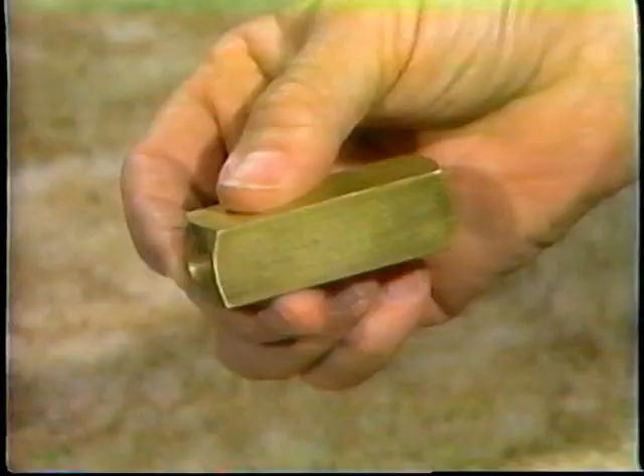Here is an important pneumatic system component. It's called a check valve because it allows air to flow in only one direction. You can see that there are only two openings in the valve body, the inlet and the outlet.

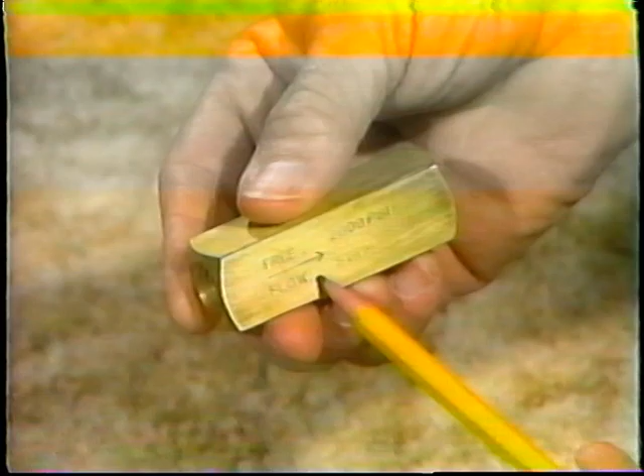This arrow indicates in which direction the valve will allow air to flow. Here we can see all of the main parts: this is the valve body, and these are the inlet and outlet ports.

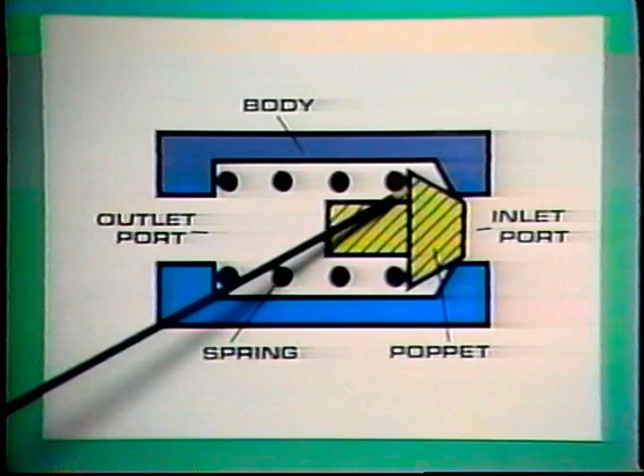The movable part is called a poppet, and it's held in place against this valve seat by this spring. The poppet in many check valves uses a seal made of a resilient material. It assures that the flow is fully stopped or checked when the poppet rests against the valve seat.

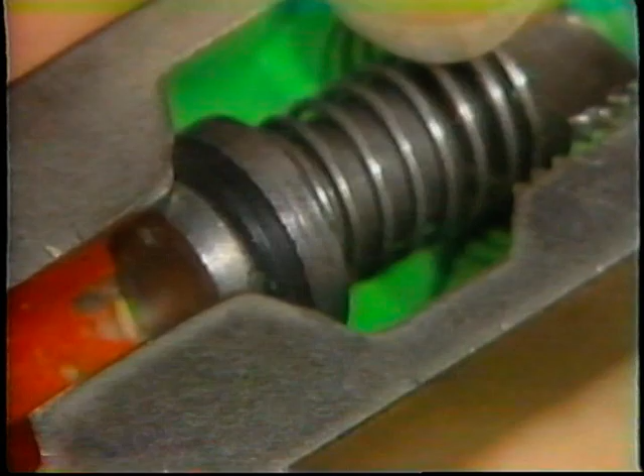Right here we should explain a new term. The term is biasing. It means that a force is applied to a moving part to hold it in a certain position. In the case of the check valve, the poppet is biased against the valve seat by the force of the spring. Here's how the check valve works.

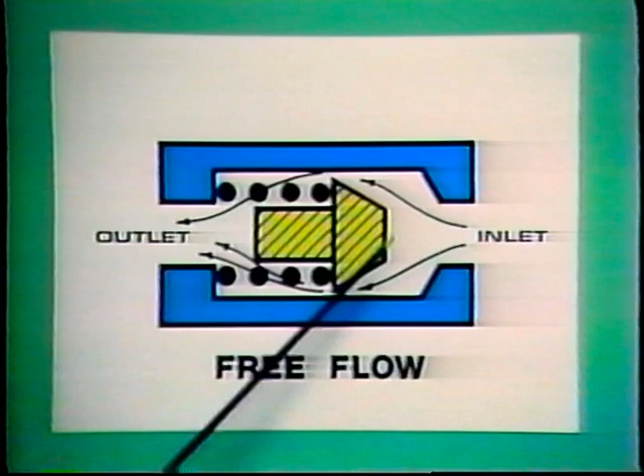When the system pressure at the inlet becomes high enough, the force of the air overcomes the force of the spring and any back pressure, and the poppet moves away from the seat. There is now a path for air to flow from the inlet through the valve to the outlet.

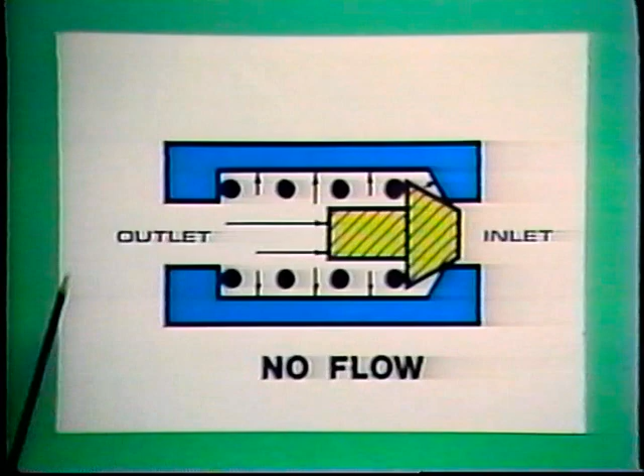This is defined as the check valve's free flow direction, and when the pressure at the inlet drops, the poppet is again biased closed against the valve seat. If air attempts to enter through the outlet, the poppet is pressed firmly against the valve seat, blocking airflow through the valve.

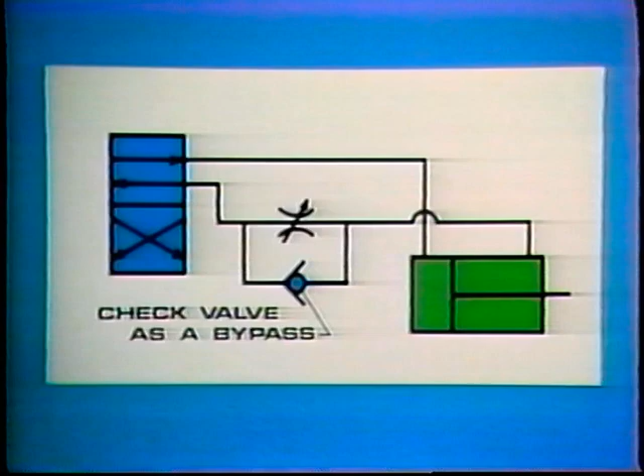The application allows free flow around a flow control valve, which otherwise would restrict flow in both directions. In this case, it allows air to enter more quickly into the cylinder, so the cylinder will retract more rapidly.

You'll remember back in Lesson 2, we described how a simple pneumatic cylinder works. Well, the cylinder is the most common type of pneumatic actuator you'll find in use. The primary purpose of a cylinder is to convert pneumatic energy into straight-line mechanical energy.

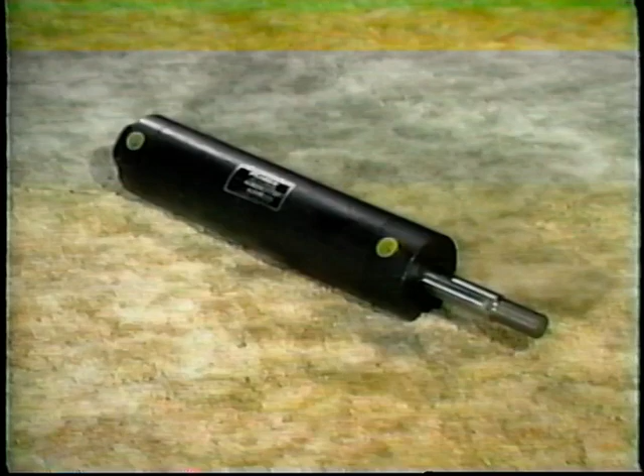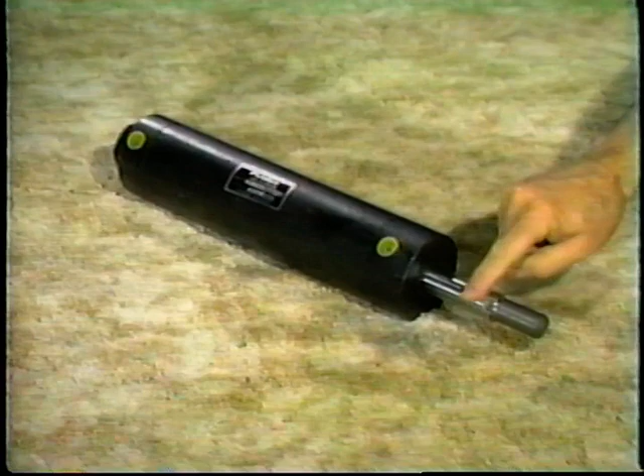Here is a typical pneumatic cylinder. There are two cylinder ports here and here, and this rod is attached to the piston inside the cylinder. This end of the cylinder, where the rod comes out, is called the rod end. The other end is called the cap end.

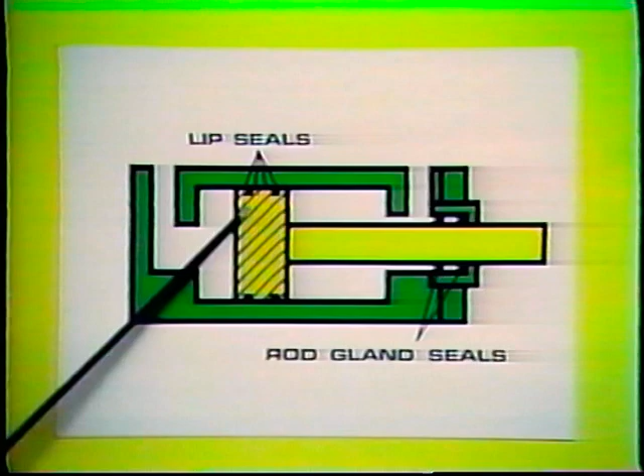This drawing shows two important areas of the cylinder. They are the lip seals on the piston and the rod gland seals here around the rod. For proper operation of a pneumatic cylinder, a positive seal must exist at both of these points.

Their purpose is to prevent air from leaking. If leakage occurs, the cylinder won't develop its full rated output, and system efficiency will be reduced.

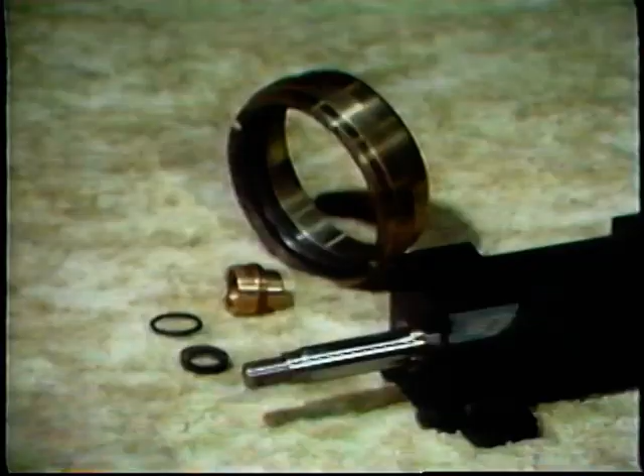Rod gland seals are used to provide an airtight fit where the rod comes out of the cylinder. They come in many sizes and are generally made from a resilient material. Here are some examples of rod gland seals.

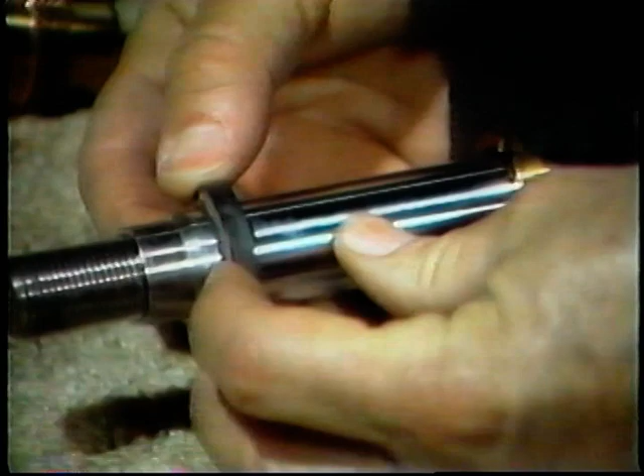This one is a popular type. It is a lip type. The edge of the lip contacts the cylinder rod continuously and provides a good tight seal at low static and dynamic forces.

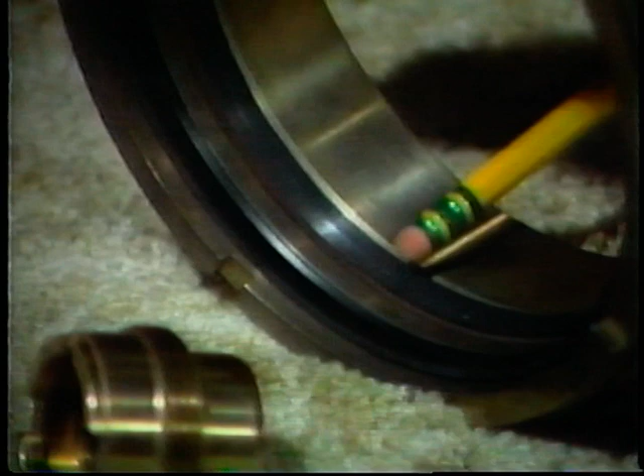Rod gland seals consist of a primary seal and a wiper seal. The primary seal keeps air and oil inside the cylinder. The wiper seal cleans the rod as it retracts.

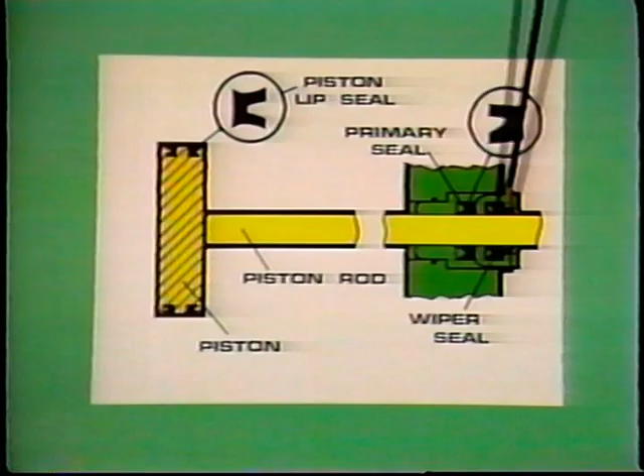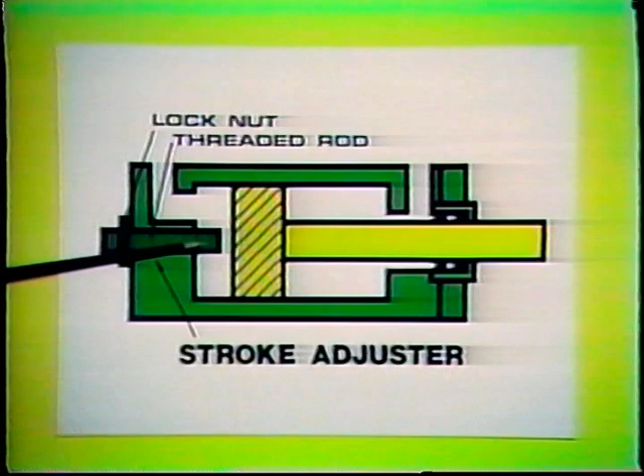Since cylinders can develop large forces and must be able to be mounted in a variety of industrial applications, you should be familiar with different mounting methods. Let's take a look at some of the more common types of mountings.

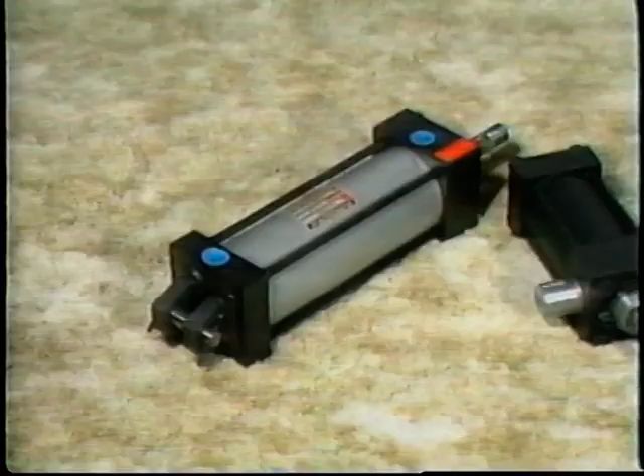This one has a fixed clevis on the cap end. It is a flexible mounting and allows the cylinder to pivot. This one uses a head trunnion on the rod end, which is another type of movable mount.

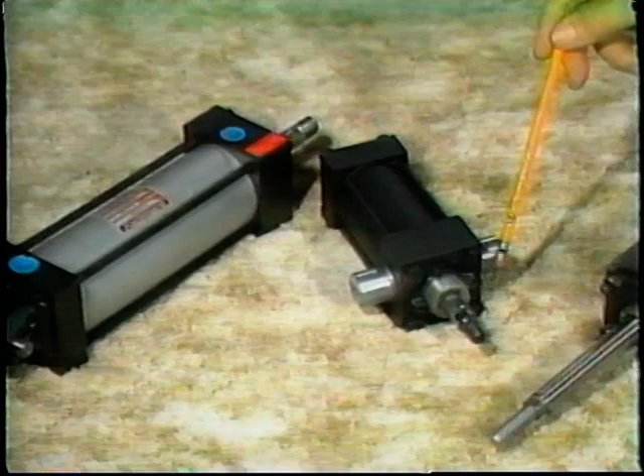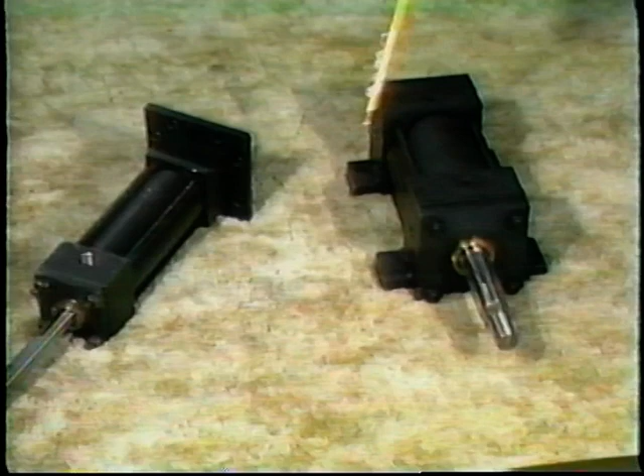This one has a mounting flange, so it can be bolted into place. And this one has side lugs attached to the end caps. Both of these last styles would be okay where rigid or fixed cylinder mounting is required.

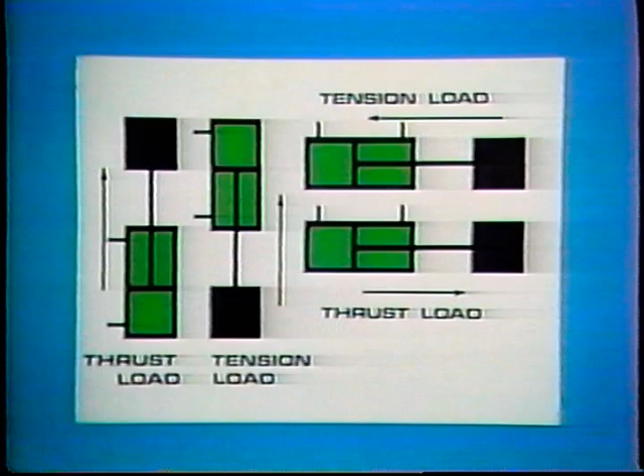No matter what type of system is used, you're going to hear two terms used quite frequently: thrust load and tension load, and you should be familiar with what they mean. When a cylinder is connected to a load, and work is done when the cylinder rod is extending or pushing on the load, as you see in this illustration, it's called a thrust or compressive load. If work is being done while the cylinder rod is pulling on the load, it's called a tension load.

It really doesn't matter how the cylinder is positioned, whether mounted vertically or horizontally. The meaning of the terms remains the same.

Because industrial applications cover such a wide range, a number of different types of cylinders are used in system design. Let's look at some of the more common ones.

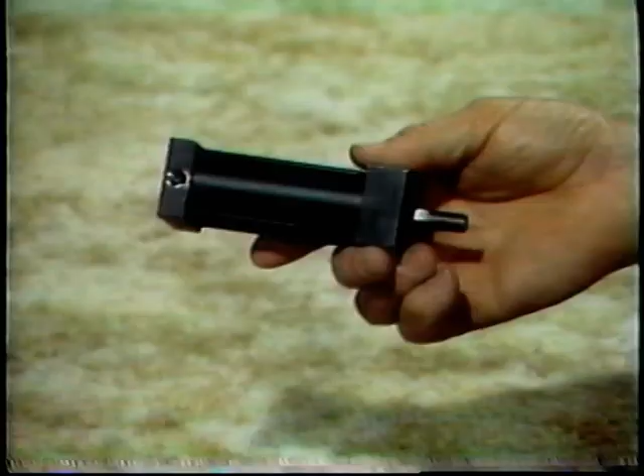This is a single-acting cylinder. It's called a single-acting cylinder because air pressure is applied to the movable element in only one direction, through this inlet port here, and this causes the piston rod to extend. A spring is used to return the piston assembly.

This is called a single-acting spring return cylinder because air pressure is applied in only one direction, here, and the force developed by this spring makes the rod retract. This vent hole is to allow air that's trapped behind the piston to escape as the piston moves.

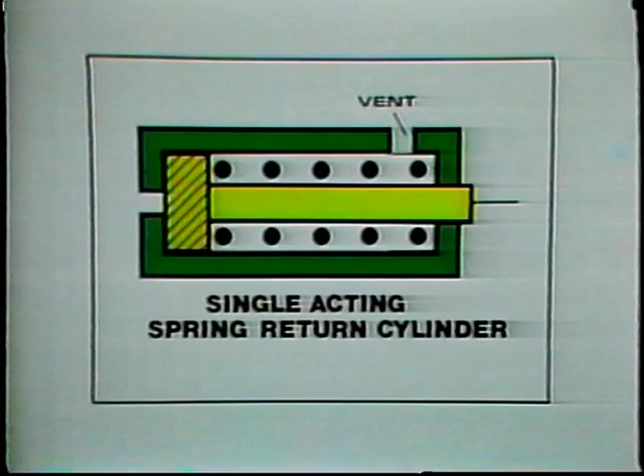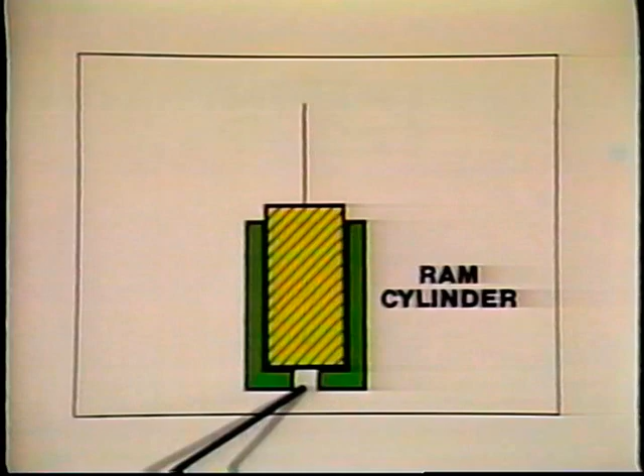Here's what's called a ram cylinder. It's basically a single-acting cylinder because there is only an inlet port here, but you can see that in this case the movable element is the piston rod itself. Gravity, or some other external force, returns the piston.

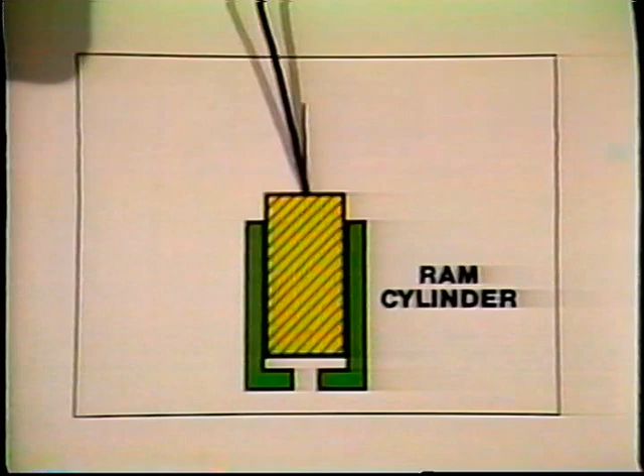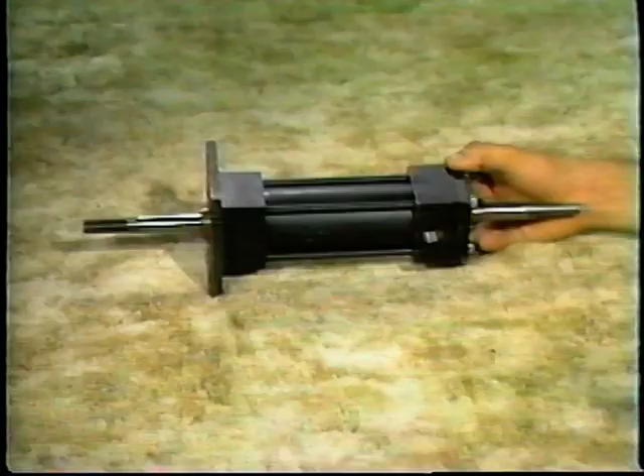If we make a cylinder with two rods connected to the piston, we have this type of actuator. It's called a double rod cylinder. With this type of unit, we can design systems with mechanical linkages connected to both ends. Depending upon our circuit requirements, the rods can be of different diameters to handle different sized loads.

You can see there are many types and styles of cylinders, and they can be used to cover a wide range of system applications. Not only is it necessary to select the right type of cylinder to do the job, but it must also be of the proper size. So let's examine what's involved in sizing a cylinder.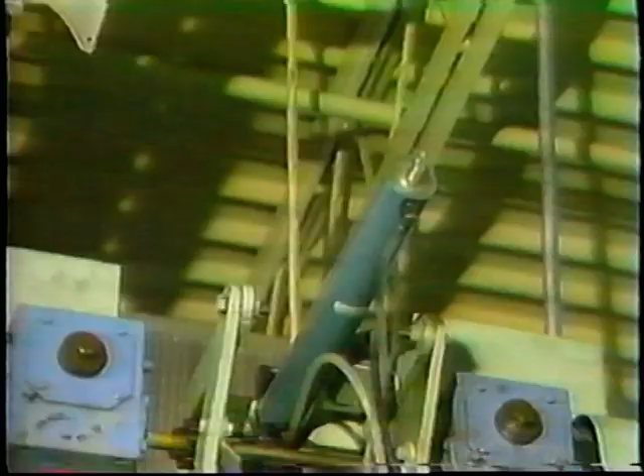First, we have to know certain things about the load. Not only the size of the basic load to be moved, but also what kinds of forces are needed to accelerate the load and to overcome any system friction.

When the total load has been determined, including the weight of the piston rod, we can calculate the cylinder size using Pascal's law. We covered it in Lesson 2. Do you remember what it was?

Here is the relationship. It tells us that the force developed by a cylinder is equal to the system air pressure times the cross-sectional area of the piston. Remember, the units have to be right. So if you want to get force in pounds, pressure must be expressed in pounds per square inch, and the area must be in square inches.

Now let's see what this means when we look at an actual pneumatic cylinder. The first thing we have to do is to define a few terms.

We're going to have to use two pressures. The one at the cap end of the cylinder we'll call P sub C, and the one at the rod end we'll call P sub R.

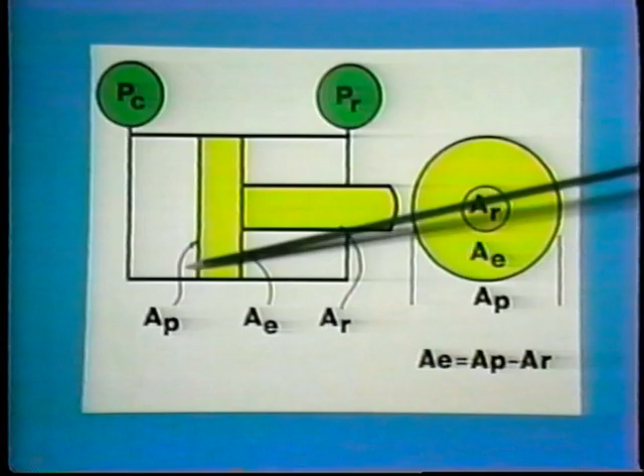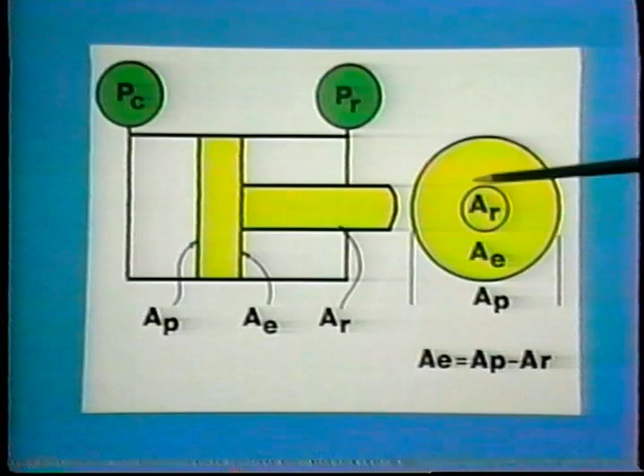Here are some important areas. This one here on the cap end is really the total area of the piston and the seal, so we'll call it A sub P. This small area is the area of the rod, and we'll label it A sub R. If we subtract the rod area from the area of the whole piston, we get the remainder, and it's called A sub E. The E stands for effective area, and it's here on the rod side of the piston.

Depending upon the application, a cylinder may be driving either a thrust load, that's one where the cylinder is doing work when the rod extends, or a tension load, where the cylinder does work when the rod retracts.

Here is the relationship to use for a thrust load. The compressive force that must be delivered by the cylinder we've labeled F sub C. The C stands for compression, because the rod is actually being compressed as the cylinder does work. The compressive force equals the pressure on the cap end times the total piston area.

In those cases where we have a back pressure, as will be the case when there is a flow control valve in the exhaust line, our formula now becomes F sub C equals P sub C times A sub P minus P sub R times A sub E. We subtract the pressure at the rod end times the effective area. However, under most conditions, the back pressure is assumed to be 0, and the formula once again becomes F sub C equals P sub C times A sub P.

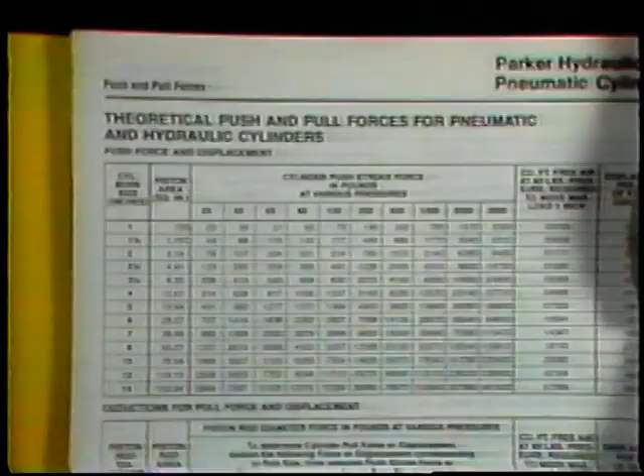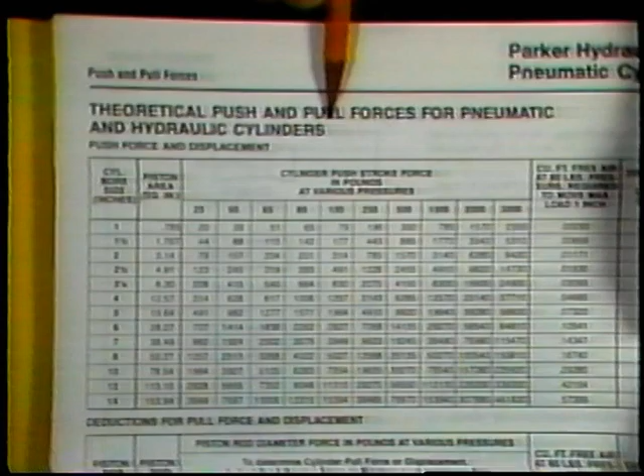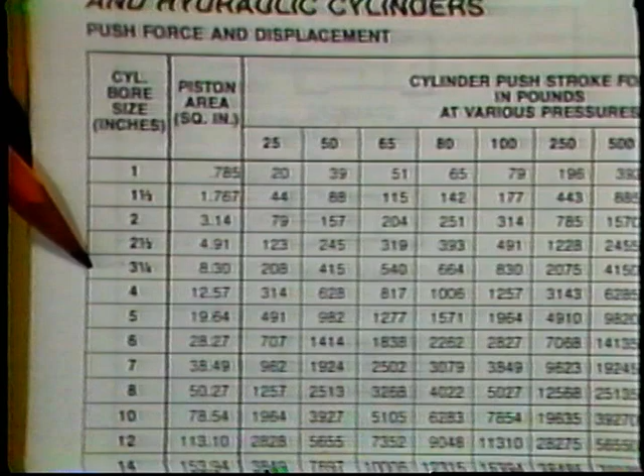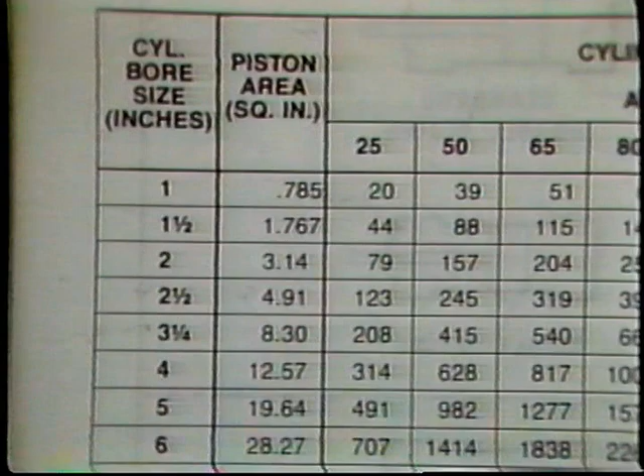Many manufacturers provide cylinder sizing charts in terms of cross-section area. This makes the selection job easier because it isn't necessary to calculate the diameter as we've just done. Just remember to select the smallest standard size piston to do the job. In our example, with a required diameter of at least 2.52 inches, a standard cylinder size of 3.25 inches is called for. But look at the area of the 2.5-inch cylinder. It is very nearly the 5 square inches that we need. In fact, we are so close to being able to use a 2.5-inch cylinder that it is the one we'd probably choose. It will move our load at a pressure of 51 psi.

The example we've just shown was for determining the size of a cylinder when there is a thrust load. How about a situation where we have a tension load? Well, we can still use Pascal's law just as we did before. As you can see, we've rearranged a few terms, and this is the equation. F sub T is the force that the cylinder must supply during retraction to move the load, and it equals the pressure on the rod side, P sub R, times the effective area on the rod side, A sub E, minus any force on the piston side, P sub C, times the piston area, A sub P.

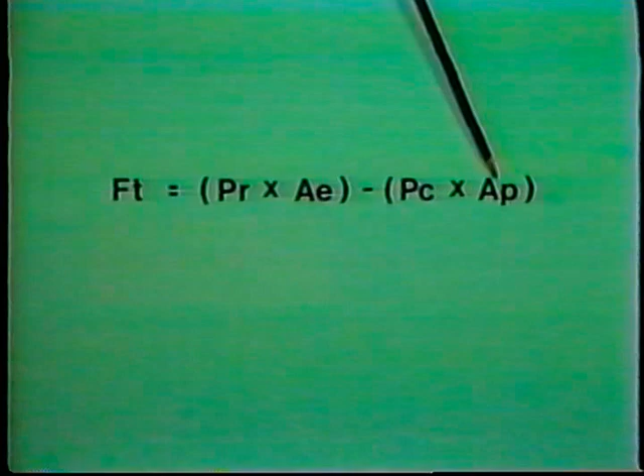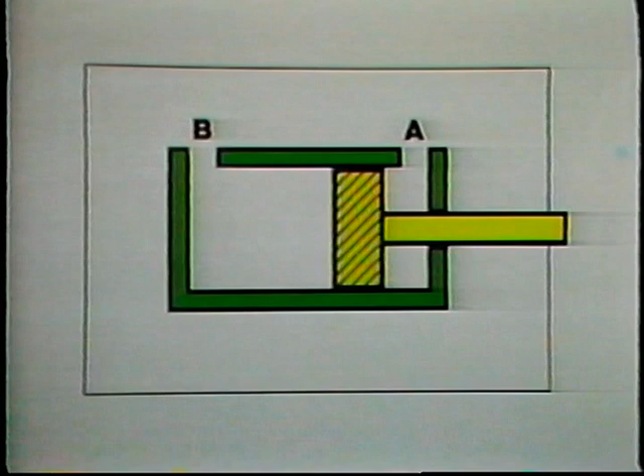And we can simplify this relationship. How? Well, since we are allowing air to exhaust freely from the cap end, the pressure at the cap end would be very, very small. We can, in fact, assume it is zero. So we can ignore that part of the equation. And here is our final equation, rearranged for effective area. It tells us that the effective area, A sub E, will be equal to the tension load, F sub T, divided by the pressure at the rod end, P sub R.

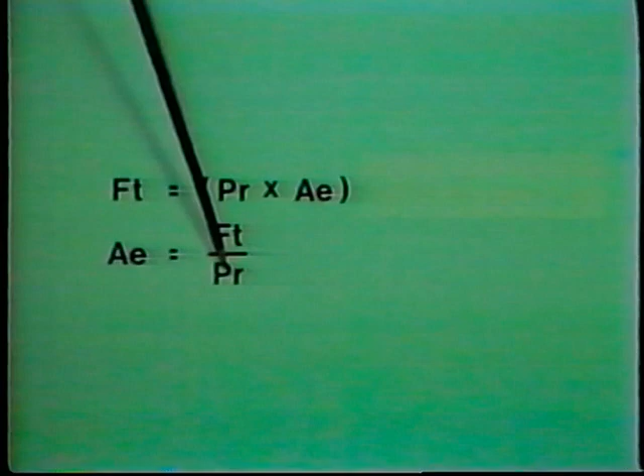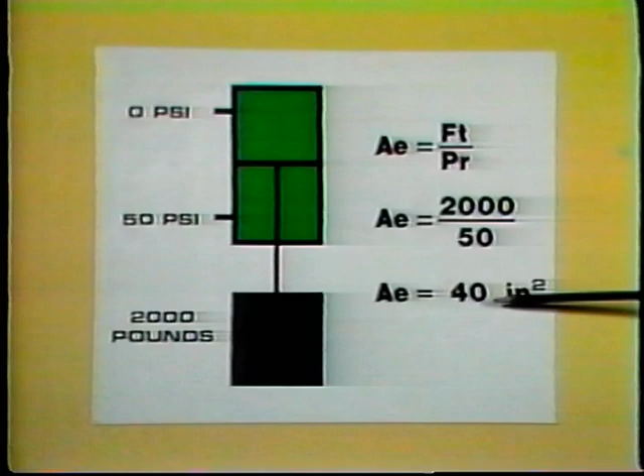Suppose we wanted to lift a 1-ton load and had a working pressure of 50 psi. The tension force would be 2,000 pounds, and the pressure here would be 50 psi. Using our simplified equation, we divide the force or load, 2,000 pounds, by the pressure, 50 psi, and see that we'd need a cylinder with an effective area of 40 square inches.

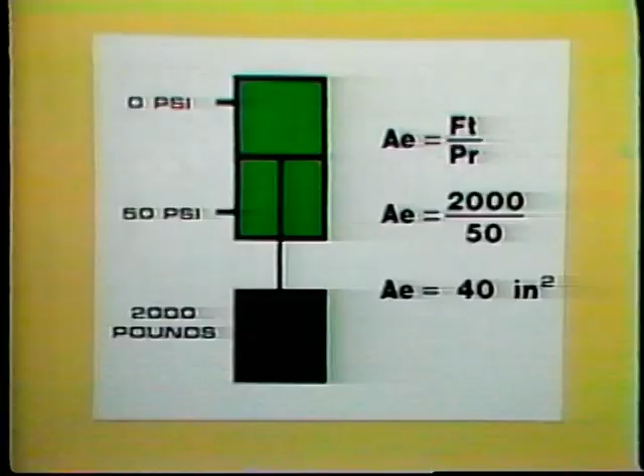Now, piston rods come in various diameters, and we'll go into how to size a rod in Part 2 of Lesson 7. But for now, let's assume that a 1 3/8-inch rod is required here. So how large a piston would we require to get an effective area of 40 square inches on the rod end? Well, first we determine that the area of the rod is approximately 1.5 square inches.

Then we take our formula for effective area and rearrange it like this. Our effective area must be 40 square inches, and the area of our rod is approximately 1.5 square inches. So the area of our piston will have to be at least 41.5 square inches. And as you'd find out from a manufacturer's chart, the smallest standard cylinder available to do the job will have an 8-inch bore.

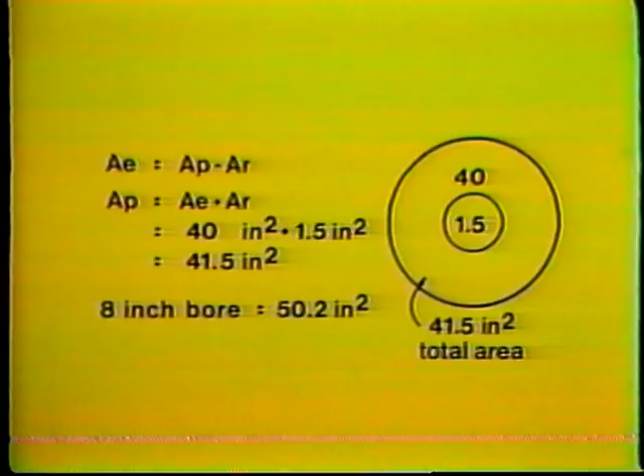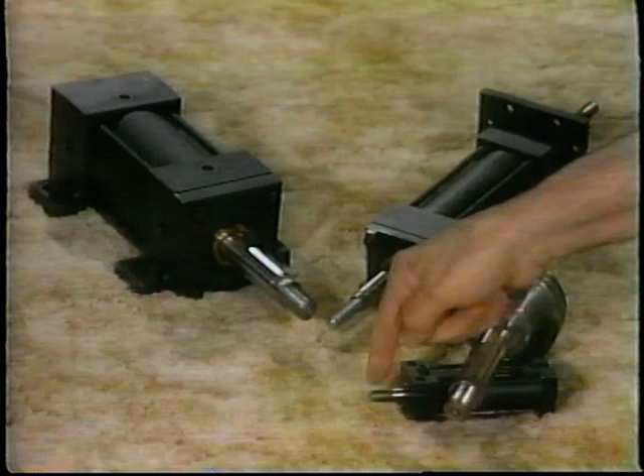Okay, there are 3 more important things you should know about a cylinder when you are repairing or replacing one. First, as I mentioned a minute ago, rods come in various diameters. The size used depends on the particular load situation. Sometimes rod diameter can be very critical, and if a rod is too small for the job, it can actually buckle. So when you are replacing a cylinder, it's important to be sure that the new one has a rod with the same diameter as the one you're replacing.

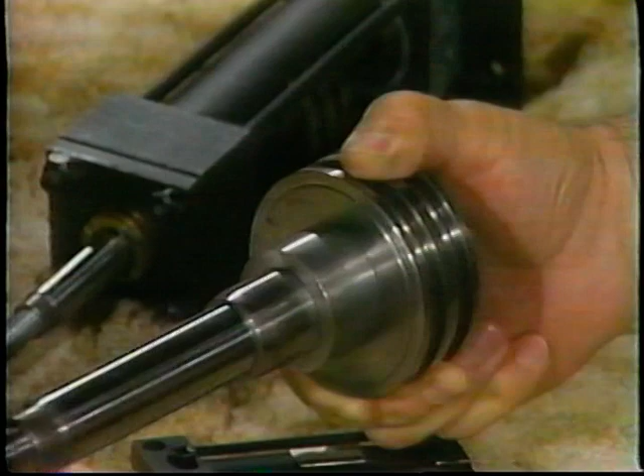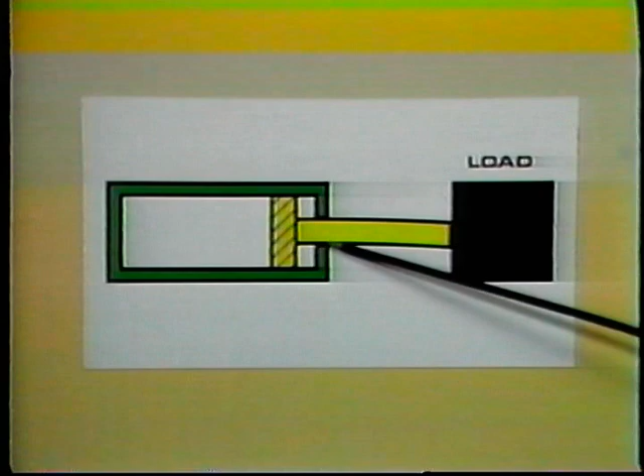Second, when you open up a cylinder, you'll sometimes find one of these. It's called a stop tube, and as you can see, it is a metal collar, and when it's in place, it fits right here over the piston rod. Let's see why it's sometimes needed. What happens when a cylinder is driving a load that is unsupported? Well, there are stresses placed on the piston and cylinder. The weight pushing down out here creates an upward stress in here, and the rod gland here can have so much side loading force placed on it that it can wear out very quickly.

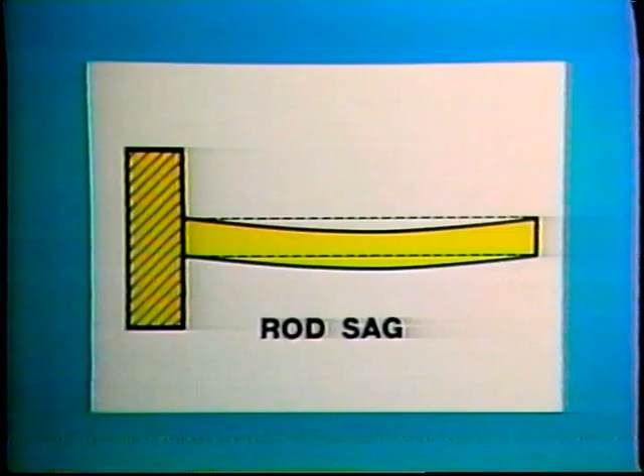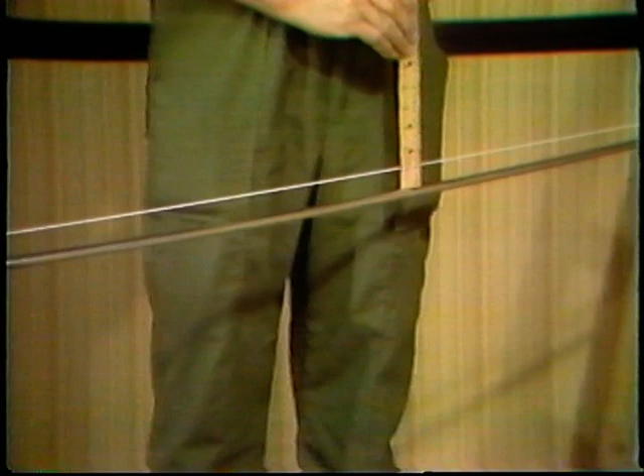Sometimes, even when the load itself is supported, the weight of just the rod can be enough to do damage to the cylinder or rod gland. Here is an exaggeration of what the piston rod looks like when a long-stroke cylinder is fully extended. You can see how the rod sags because of its own weight. In fact, a 5/8 inch diameter piston rod weighs about 1 pound per foot. If we had a rod of this size, 10 feet long, it would sag over 1 inch at the center. And this would produce a large side loading force on the rod gland, which would cause excessive wear and eventually leakage at the rod end.

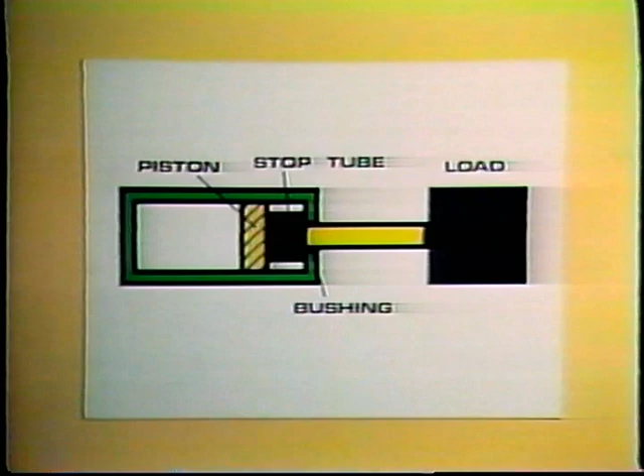When it is in place and the piston rod is fully extended, as you see here, the stop tube separates the rod gland bushing and the piston. And this separation greatly reduces the amount of side loading force. To work effectively, the stop tube must be the proper length. If you are replacing a cylinder that has a stop tube in it, be sure that the new one has a stop tube of the same length.

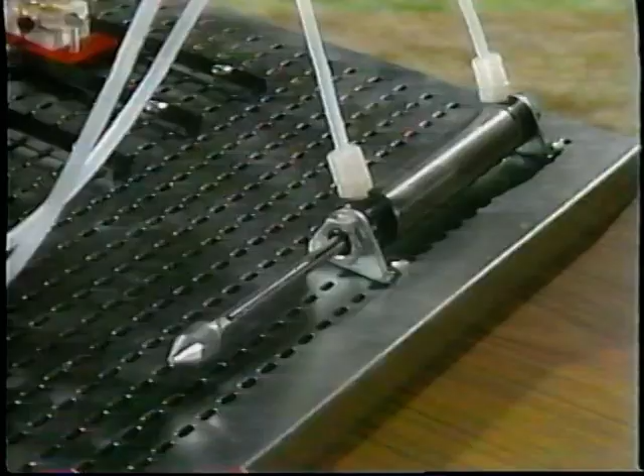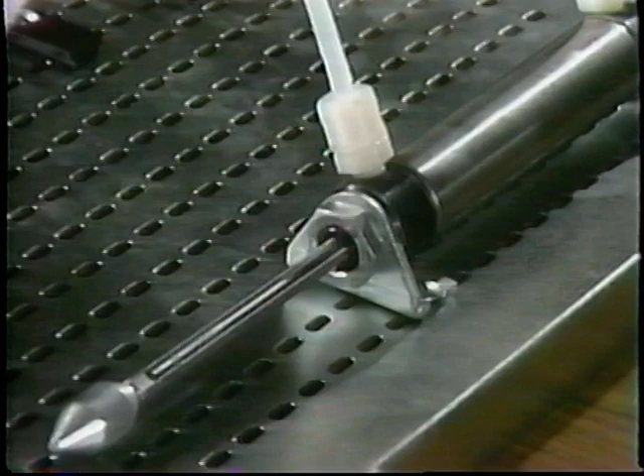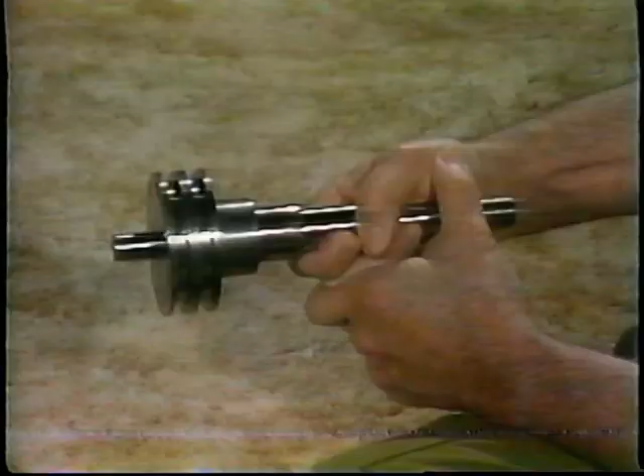And last, before we leave cylinders, let's talk about the cushions that are sometimes built in. When a moving piston is suddenly stopped at the end of a stroke, a concussion results, which we call shock. If the piston is moving very rapidly and is stopped too abruptly, the shock can damage the cylinder. So to help protect the cylinder, manufacturers often equip them with cushions that help absorb the energy of the moving system. Here is a piston from a cylinder that is cushioned.

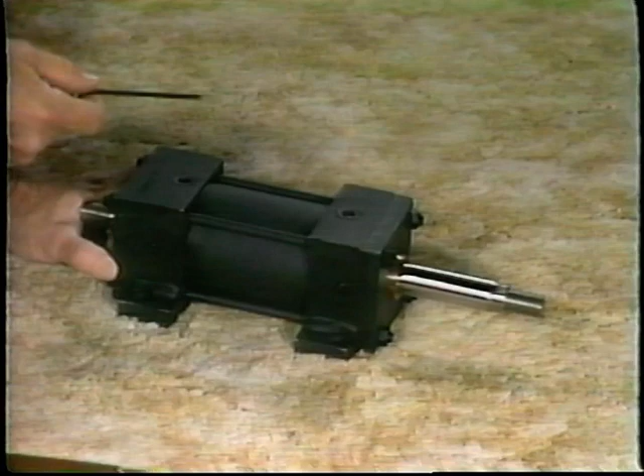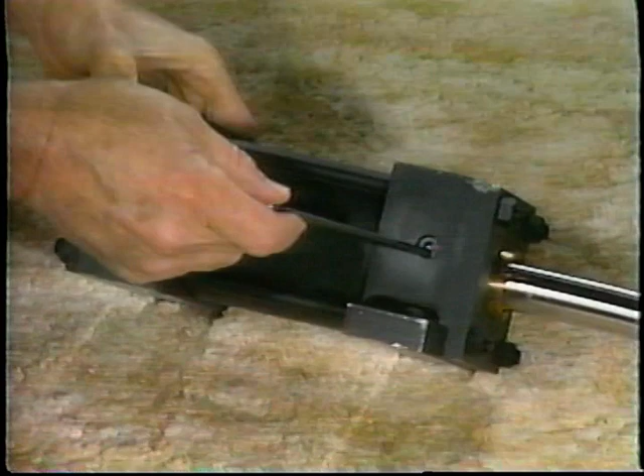This plug here on the cap side of the piston is called the cushion spear. This one here on the rod end is called a cushion sleeve. Here is a cylinder that has an adjustable cushion. Here are the inlet and outlet ports. Here is the rod, and you can see these adjusting screws near the cap and also here at the rod end. Some cylinders may only have cushioning on one end.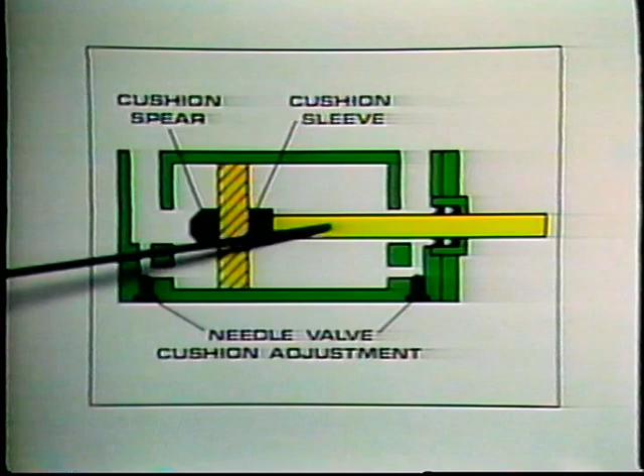Here's how a cushion works. Let's assume the cylinder is retracting and the cushion spear moves toward the seat at the cap end. As the cushion seats, it traps air between the piston and the cap end.

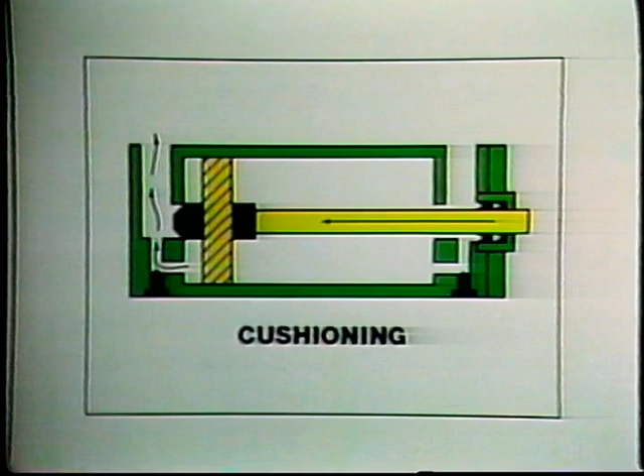This air pressure helps slow the piston, and by adjusting this needle valve, we can affect the rate at which air bleeds off, and therefore the rate at which the cylinder cushions the load. There is quite a bit more to know about cushions, as well as other design considerations of cylinders, but we'll save that for part 2 of this lesson.

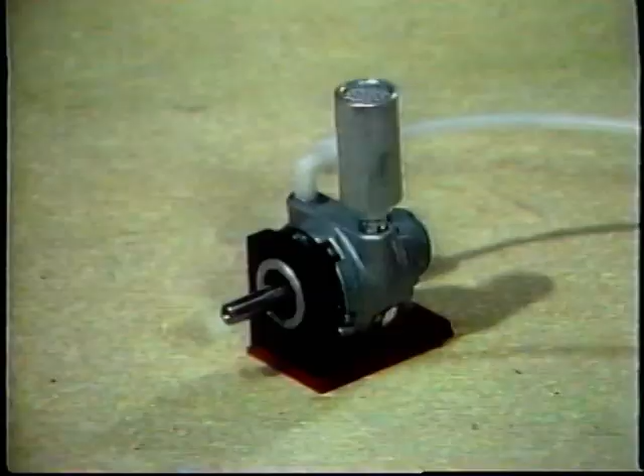For now, let's talk about another kind of actuator, the pneumatic motor. Pneumatic motors are used in many applications that require rotary motion. They convert the potential energy of compressed air into rotary mechanical energy. This is just the reverse of what a compressor does.

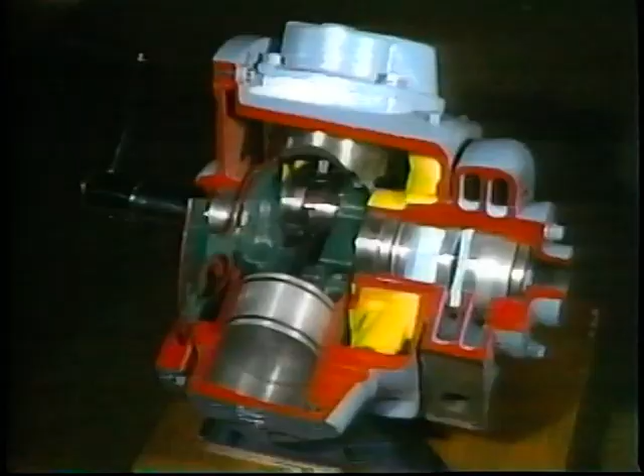If you'll think back to Lesson 5, you'll see that each type of pneumatic motor looks inside a lot like one of the compressors we discussed. There is a piston type, a vane motor, and a turbine, which is a lot like a dynamic compressor.

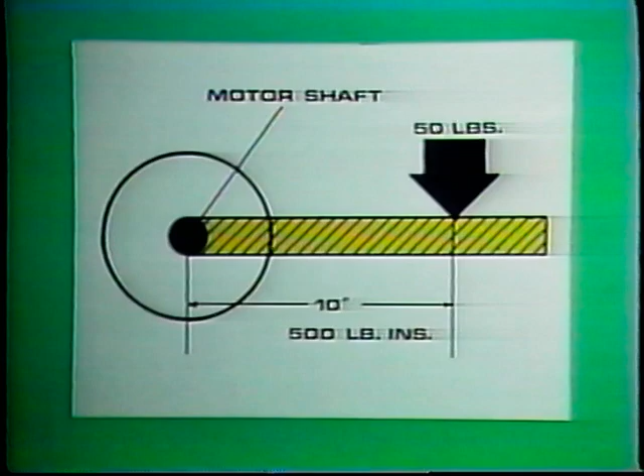These motors all have one thing in common: when they are connected to a supply of air, they all develop an output torque. Torque is a rotary or turning effect. The torque rating of a motor tells us how much rotary force a motor can develop.

In this illustration, if the motor produced a force of 50 pounds at a distance of 10 inches from the center of the shaft, we'd say the motor was producing a torque of 500 inch-pounds.

Now, before we go any further, let me give you a safety tip. Unlike an electric motor, a pneumatic motor won't overload, but it can run away if the governor sticks. This can be dangerous, especially in grinding applications. So the built-in governor should be checked regularly to make sure it is operative.

Here is an efficient pneumatic motor. It is a piston type. Here is the input port, and here is the exhaust port. Torque is delivered at the output shaft here.

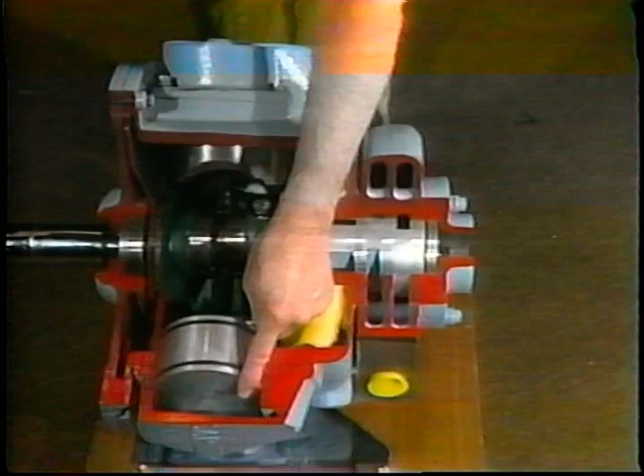Compressed air comes in here and flows through these internal passages to the cylinders. The air pressure forces against the piston, causing it to move downward. The pistons are connected to the output shaft by these connecting rods, and an output torque is developed. This rotary valve controls airflow to the proper cylinders.

Piston-type motors generally run at speeds below 1,000 RPM. Since the price-to-power ratio of this type of motor is quite high, they are not used as much as other types, like the vane motor.

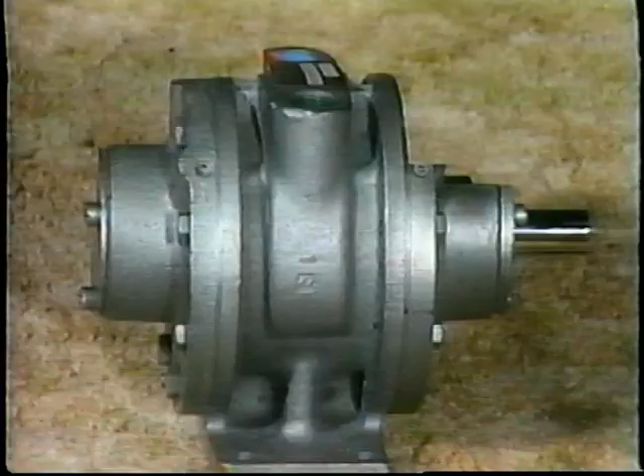This is a vane-type motor. Here is the input port, and here is the exhaust port. Power is delivered at the output shaft here. The vane-type motor develops output torque by allowing compressed air to expand against extended vanes.

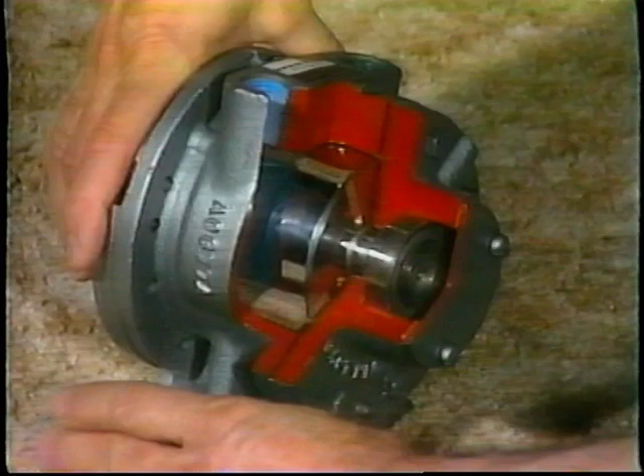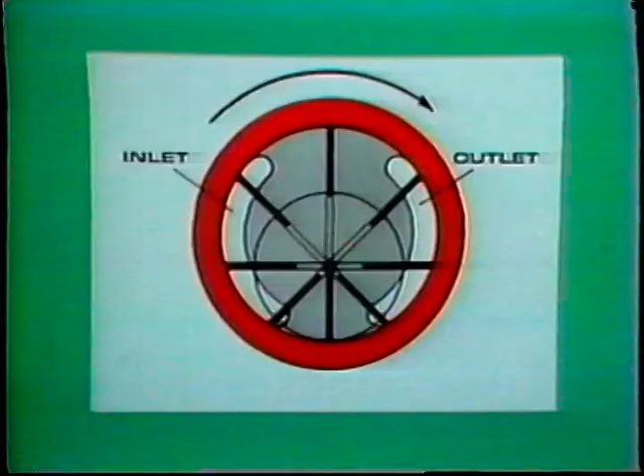Here is what the vane motor looks like inside. These movable vanes are free to move in this rotor, and when turning, form tight seals with the motor body here. As the rotor turns, power is delivered to this output shaft. The flow of air to the motor is directed by openings in the port plate.

Because the rotor is positioned off-center with respect to the ring, the area of the vanes exposed to air pressure increases as we go from bottom to top. This results in unequal pressure and a force being developed at the motor shaft.

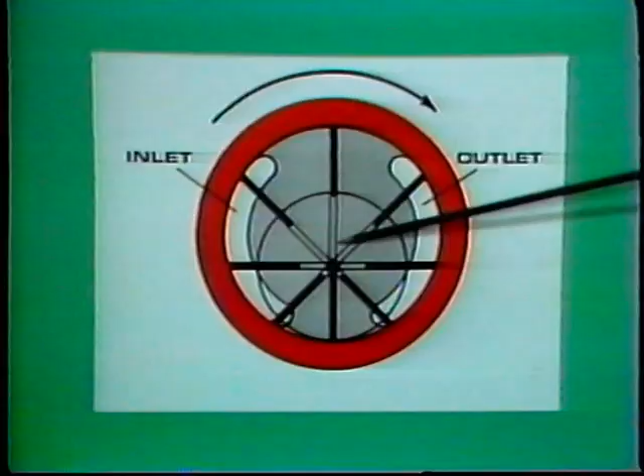For the vane motor to operate efficiently, a positive seal must exist at the vane tip. To assure this, the vanes are extended continuously by air pressure, directed to the underside of the vanes. During startup, light springs help ensure an initial seal until the motor comes up to speed.

As you might suspect, the larger the area of the vanes, or the higher the air pressure applied to the motor, the more torque can be developed at the output shaft. Vane motors can produce about 10 times as much power in the same size as the piston type.

When a designer selects a pneumatic motor for an application, he should take into account the starting and running speed, the torque required to start and drive the load, and the motor horsepower. A good rule of thumb for horsepower is that the air motor should deliver the required horsepower at about 65% of the available line pressure. That way you can be sure that the full line pressure will be enough for starting and for overloads.